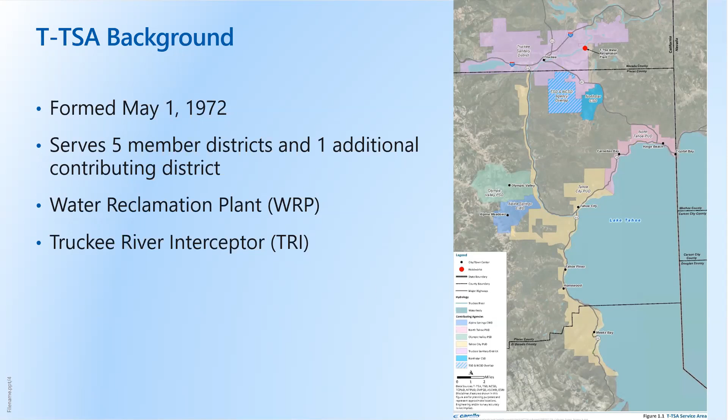So just a little background. TTSA, many of you know this, but for those that don't, was formed in 1972, serving 5 member districts, as well as collection of wastewater from Northstar CSD. You can see the map here on the right that shows the service area that TTSA is responsible for, for collection and treatment of wastewater. And they own and operate the Truckee River Interceptor, which runs from Tahoe City to the treatment plant, as well as the water reclamation plant, which treats the wastewater and discharges it into a soil aquifer basin before it enters into the river.

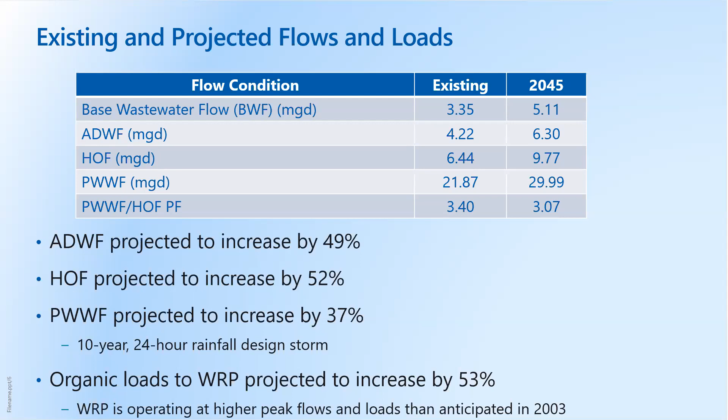So, just to summarize existing and projected, we're looking at average dry weather flow projections to increase about 49% between now and the end of the planning period. High occupancy flow increases about 52%. And peak wet weather flows are expected to increase about 37%. And then specific to the treatment plant, organic loads are projected to increase similarly, around 53%. And it is important to note that currently the WRP is operating at higher peak flows and loads than anticipated in 2003, which was the basis for the last plant expansion. So those are some of the foundational elements of flow that we used.

We did look individually as well at peak wet weather flows coming in from each contributing agency to develop the peak flows that were used for the capacity analysis. And all of this information and the foundations and the justification for these flows are contained in the report.

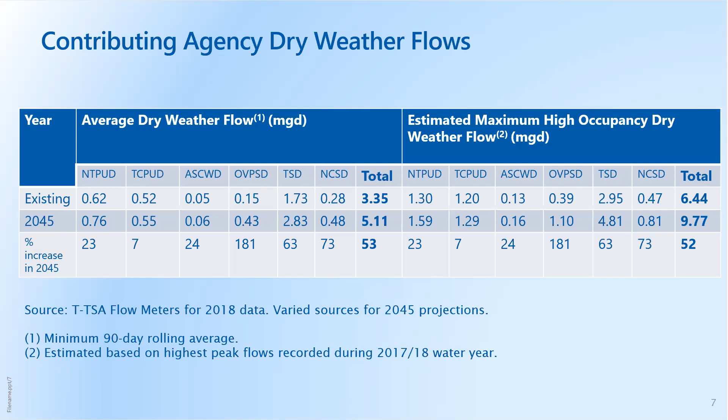So now I'm going to talk about the analysis that we did for the TRI on the capacity side. I'm also going to talk about the analysis we did on the condition assessment. Like I indicated earlier, we developed a SWMM model of the TRI. We calibrated that model to a long history of historical flow events during multiple storm events, as well as high occupancy flow events, in order to ensure the accuracy of that model for the analysis.

And this chart on the right shows the 2045 condition, or the hydrograph coming into the treatment plant that was used for the analysis. And you can see the dash line on the bottom shows the high occupancy flow at 2045, as well as the peak wet weather flow rising up there on the left-hand side of the chart up to 30 MGD. And these were the basis for the capacity analysis of the TRI, and the findings are highlighted here on this slide.

The first one, project C-1, is about 5,000 feet of 24 and 27 inch gravity main that will be upsized to 30 inch. And that's down in the region of the River Road near Bridge 9. The other reach is approximately 1,000 linear feet of 24 inch gravity main that will be upsized to 30 inch, just north of Goose Meadows there.

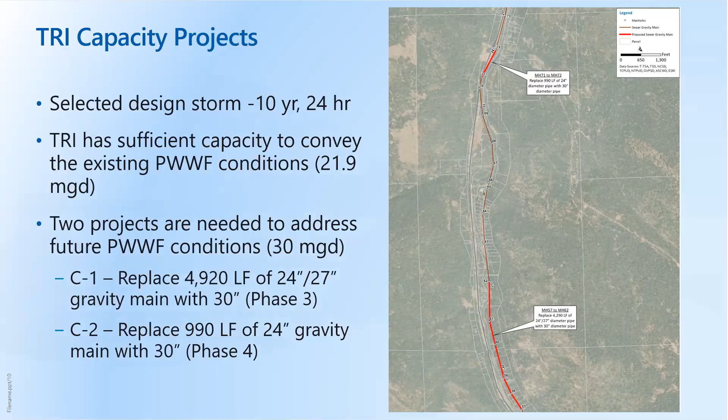And these two are obviously planned to be implemented as growth occurs. And we place them in the CIP in phase 3 and phase 4. So overall, a fairly good news story about the current condition of the TRI, but there are some expected capacity increases as growth occurs in the basin.

So the next element was the condition assessment and rehabilitation recommendations. And this component of work included multiple task elements. The agency has compiled an extensive database of inspection data and CCTV data and condition scoring of the TRI. We took all of that information and data and aggregated it into a single database in order to compare conditions as they've changed over time.

We developed recommendations related to that condition assessment finding and developed anticipated capital projects. We also prioritized those rehabilitation projects and placed them within the 20-year CIP based on risk, and also looked at capital cost expenditures associated with those improvements.

The findings from the TRI were interesting, and they do involve some explanation. So we utilized the NASSCO PACP scoring system, which uses a rating of 1 through 5, 1 being essentially new pipe, all the way to 5, which indicates the need for some near-term improvements.

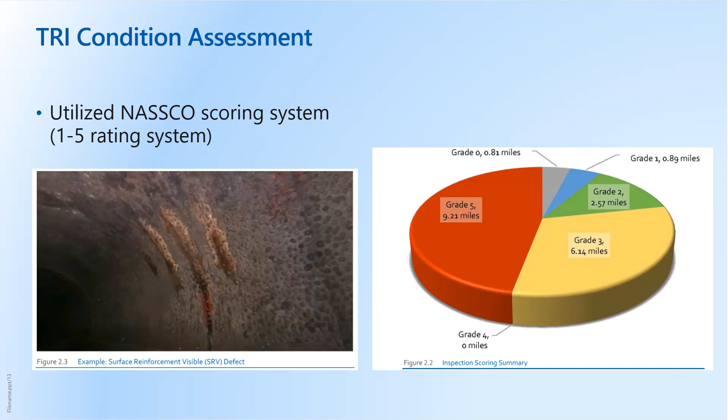So while this graphic shows a significant amount of grade 5 defects, the bulk majority of them are associated with this manufactured defect in the pipeline. And we've developed a plan to implement some further investigations into this surface reinforcement visible to determine the real risks associated with the TRIs and this element of it. Overall, in general, the other reaches of the pipe are in very good condition.

River crossing R1 is about 1,300 feet of 24-inch pipe. That project is set to move forward and to commence in 2022. Estimated cost is about $2.4 million. The other 2 reaches of pipe are significantly shorter, about 220 feet of 30-inch pipe, and those are about $500,000 each. Again, those are scheduled at the latter portions of phase 1 in 2025.

We included 2 other elements of the TRI renewal program. R4 is an allocation of costs over phases 2 through 5 of close to $16 million for annual rehab and rehabilitation projects, as future investigations find them. The agency undergoes an inspection program where they inspect the entire TRI over the course of 3 or 4 years. As new degradation and replacement needs come about, this money will be allocated to provide funding for that in the later phases 2 through 5.

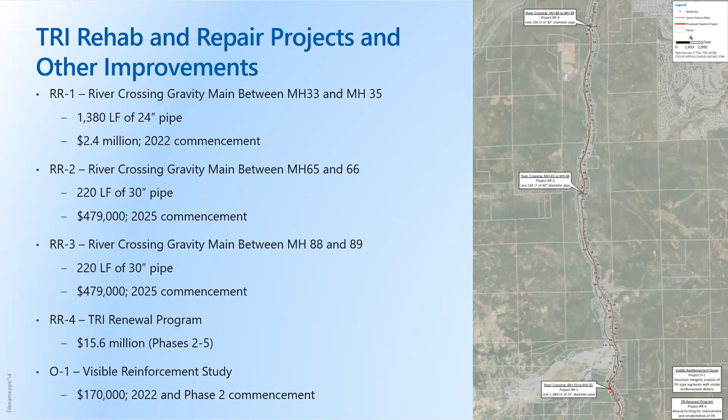The other thing that we included was a visible reinforcement study. We've included some money as a specific project for the agency to go in and do further investigation on the surface reinforcement issues that I discussed in the previous slide. So that's a summary of the capacity and the condition of the TRI. And now Ricky's going to take over talking about the WRP capacity and rehabilitation project summary.

Thanks, Tim. Assume everybody can hear me okay.

So I'm going to review the WRP first, starting with the rehab and rehabilitation project recommendations. Similar to with the TRI, we evaluated the treatment plant both in terms of capacity as well as the condition of the plant, and then also looked at places where we could optimize certain processes in the plant to provide either better performance or cost savings for things such as chemical use.

So moving forward, the plant was constructed in phases. The original construction was in 1975, and the figure on the right is a map of the WRP showing in different colors the years of construction. Yellow is 1975, and what you can see here is that more than 50% of the plant was constructed in that original 1975 construction, and is now approaching about 50 years of service life.

So we'll see as we get into the recommendations for the rehabilitation that a lot of these projects are related to aging equipment and an aging treatment plant, which is not uncommon given that wastewater regulations started in the 1970s with discharge requirements. Major expansions were in 1981. In 1990, phosphorus removal was added, as well as a maintenance facility. 1995 was the chlorine building and headworks building additions. And the last major expansion was in 2003, which expanded the process capacity as well as added the biological nitrogen removal facility.

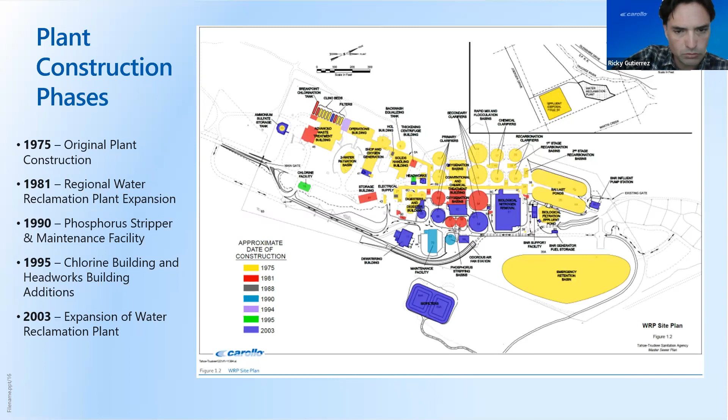So similar to what Tim described for the TRI, we followed a similar condition scoring system for the WRP, with a rating of 1 to 5, 1 being excellent and 5 being very poor. For the excellent condition, these are close to new in terms of the equipment condition. They only require preventative maintenance and have more than 75% of their useful life remaining.

Where we get down to very poor, this gets progressively worse. Very poor is something that has failed or will likely fail imminently, and there might not be parts available to replace those due to the age of the equipment, and so those are obviously things that would need immediate repair and are high on the priority list.

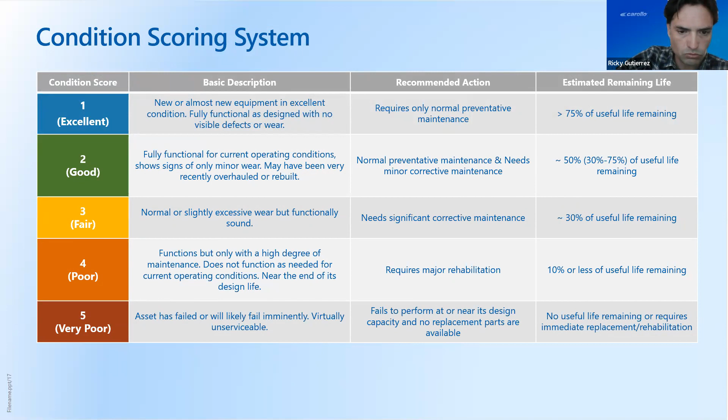So as we went through, we spent several days out at the plant with several engineers of different disciplines. We had structural, electrical, instrumentation, as well as mechanical and process engineers looking at various equipment along with TTSA operations and maintenance staff, and went through and scored the various process components and equipment throughout the plant, as well as looked in detail at the structures themselves.

So we had to make some judgment calls based on when timing of different improvements made sense throughout the plant, and also looked at grouping these into larger projects where they made sense, as that is usually the most efficient way to handle certain things, just due to the way these plants operate. Things have to stay in service and keep flow running through the plant. So you want to aggregate as much as you can to minimize shutdowns and reduce operations and maintenance staff time when dealing with these construction projects.

So when we were looking at when to implement, obviously components that were nearing the end of their expected life or had major issues or were a safety concern were in that near term, 0 to 5 years, phase 1 is what we called it. Projects that were approaching the end of their life but still were functional and had some life left were in phase 2, the 6 to 10. And then other long-term projects needed to address future capacity or preventative measures such as coating and other improvements were in that later phase, 11 to 25 years out.

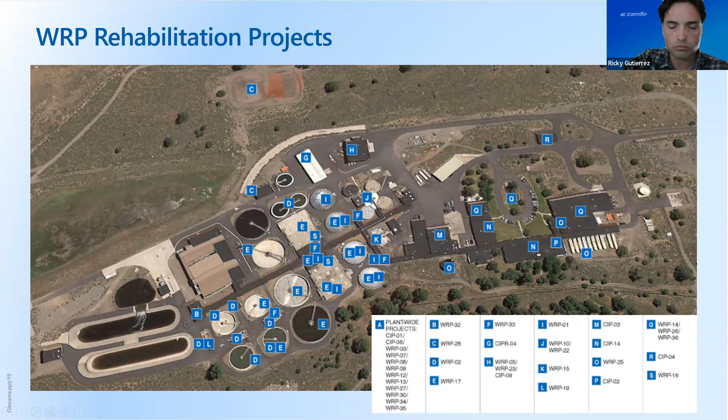So next I'll get into the capacity project recommendations. Starting out, I wanted to give a little synopsis on how we performed the capacity analysis for the WRP. This was a two-part analysis where we had two separate models. One is a hydraulic model using Visual Hydraulics, where we looked at the hydraulic capacity of the plant, how the plant can handle influent flows and hydraulically get those through the plant or to storage if it can't get them through. Additionally, using the BioWin model, we looked at the process capacity analysis, both in terms of the liquid processes as well as the solids handling processes, and the ability of the plant to treat flows and meet the discharge requirements.

So the criteria that was used was, we looked at the peak instantaneous permitted flows of 15.4 MGD. We also looked at the 10-year 24-hour storm event for future conditions in 2045, as well as the future max week high occupancy summer flow conditions, which was 8.13 MGD. And that was important for modeling the process capacity analysis, since that's when you have the highest loads going through the plant in the future.

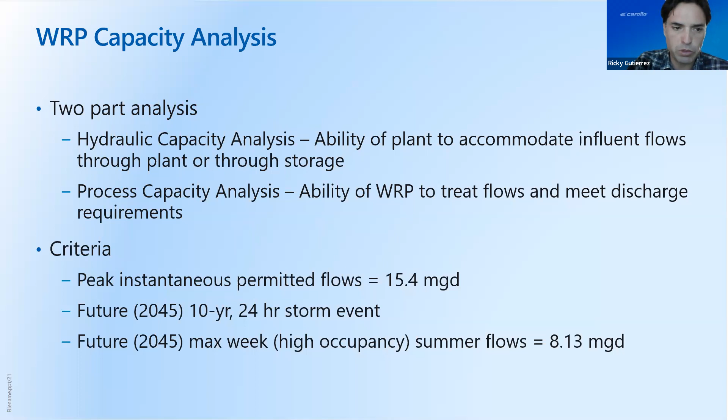So with the hydraulic capacity summary, it's basically a good news story. No hydraulic capacity limitations were identified for meeting those future peak instantaneous flows. The hydrograph on the right, similar to the one that Tim showed earlier, shows that 2045 10-year 24-hour storm event.

The dashed line on the bottom here shows the high occupancy flows. The blue line shows that peak wet weather storm event, which is hitting near 30 MGD. And so if you draw a line across here at 15.4, which is what can be pushed through the plant, you'll see that the shaded area is the volume that can't be passed through the plant and has to go to storage. So we identified that with this design storm event, 13.4 million gallons of flow would need to be diverted to storage. Fortunately, the plant has plenty of storage capacity.

The emergency retention basin at the plant can store up to 15.4 MG. So it can handle that design storm event. For larger storms, there's additional offsite storage ponds that have a capacity of 24 MG. So close to 40 million gallons of storage capacity available to handle large storm events. So no concerns in terms of hydraulic capacity.

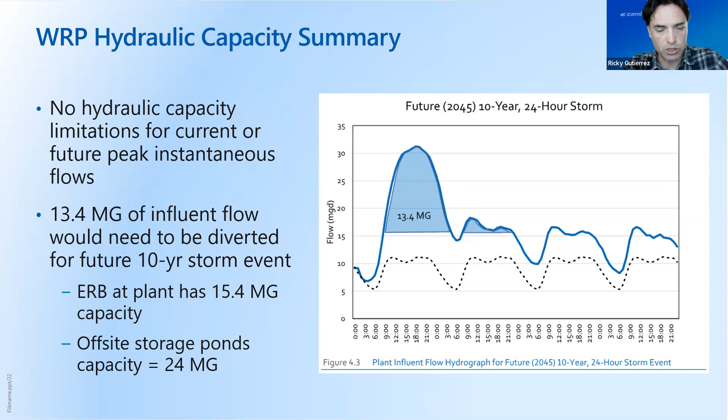The first is the biological nitrogen removal, specifically the denitrification part of that process had some limitations. And so there's a project looking at a nitrified effluent recycle that could help mitigate that. Anaerobic digestion, there was some limitations in terms of volatile solids removal. And so there's some process modifications that were recommended to address that limitation.

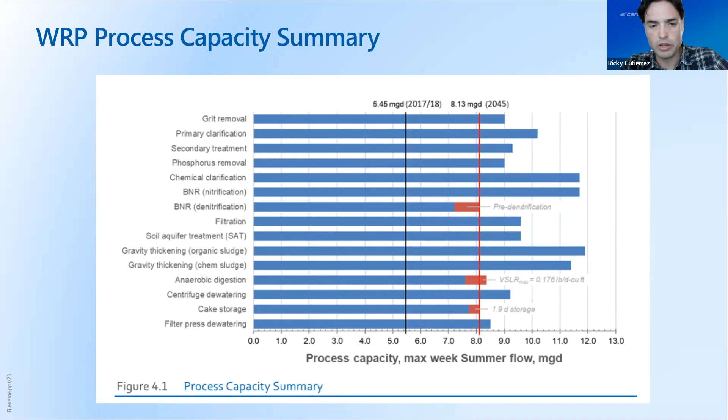And then finally in cake storage, there was identified about a 2-day deficiency in cake storage, meaning that additional hauling would be required or additional cake storage needed. And cake is basically what we call the dewatered solids that come out of the treatment process.

So in terms of capacity projects, 8 capacity related projects were identified throughout the plant. Similar to what I showed before for the rehab projects, the letters here on the aerials show where those projects were identified. And the legend down here relates back to the CIP and the table for what those projects are and the identification of each of those. So far less capacity related projects than rehabilitation related projects, which makes sense given what the findings showed.

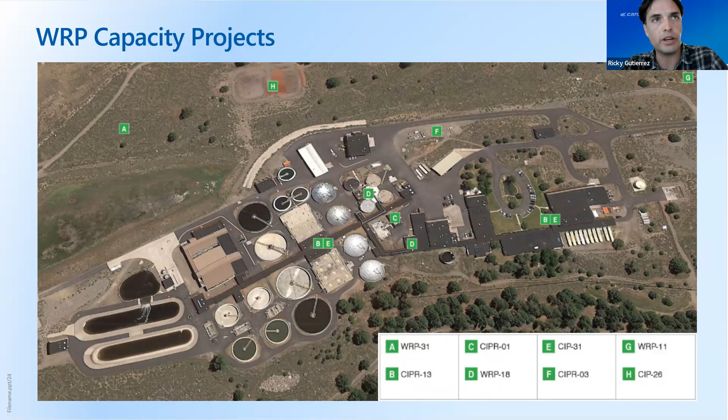And then there was one last category of projects which we termed optimization improvements. And so I'll go through that. And part of what played into this was, as part of the master plan, we did a regulatory analysis looking at future regulatory scenarios at the plant. What could be in store in the future from the regulators in terms of changes to the permit requirements and discharge requirements may come down the road.

So we looked at 4 different scenarios as part of this analysis that we deemed could be possible in the future. One is the waste discharge requirements could remain the same. So no real change there. But even if they do stay the same, there's places where we could look at process optimization. And so that's what we looked at there. There could be more stringent nutrient limits in the future. And so this would require some optimization as well as potentially some process upgrades.

There's a chance that there could be a requirement to go to a National Pollutant Discharge Elimination System permit, an NPDES permit, with additional limits that could be in terms of disinfection byproducts or DBPs, organics, toxicity, metals. A lot of those things could be rolled into an NPDES that would require additional process modifications and additions to the plant.

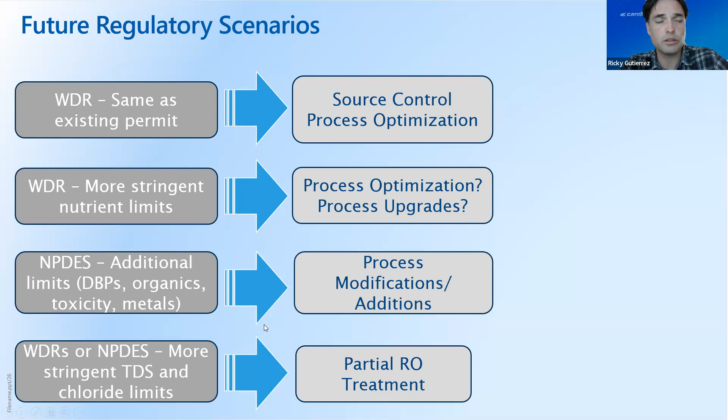And finally, there could be more stringent total dissolved solids limitations or chloride limitations. And this scenario, although unlikely, would have significant ramifications for the plant, would require going to a partial reverse osmosis treatment to remove those dissolved solids. And so obviously much more impactful in terms of costs.

So when we decided what we plan for, what is the likelihood of each of these scenarios happening, we decided to plan for the first 3 scenarios as they had the highest likelihood of occurring. So we have projects that are identified to address all the first 3 scenarios if they were to occur. For the 4th scenario with the partial RO treatment, we have a memo in the master plan that you'll see that looked at space planning for these facilities, but we haven't incorporated the costs into the CIP for this, since at this point it's unlikely that the plant would need to go there.

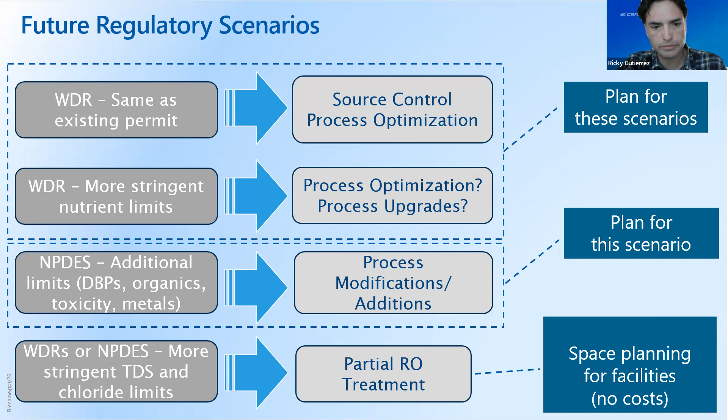So for optimization projects, there were 6 projects that were identified for process optimization throughout the plant. And those are listed here. The first is called a WASSTRIP implementation. The goal of this project would be to reduce lime usage and create a marketable phosphorus product. So there could be some significant cost savings for TTSA if this project's implemented. So it seemed to be worthwhile to look at.

The next projects here are for nitrified effluent recycle, and this is to address the denitrification process limitations. Also, the goal would reduce methanol consumption and could also reduce odors by recycling nitrified effluent to the head of the plant. It also includes some washdown equipment for the BFE pond. The next one here is flow equalization improvements. This would add some additional cleaning abilities to the ballast ponds, which are currently very operator intensive to clean out. So that would facilitate that.

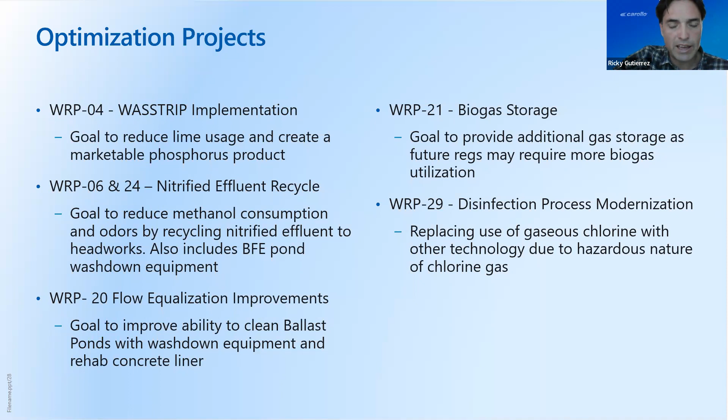Project 21 is a biogas storage project. That goal is to provide additional gas storage as future regulations may require more biogas utilization and less use of the flare. And then finally, the project 29 disinfection process modernization looks at replacing the gaseous chlorine with some other technology due to the hazardous nature of chlorine gas, and TTSA would like to move away from that. So that is also included in the CIP.

So finally, we'll get into the numbers, the costs for the master plan. So the 25-year CIP, as I mentioned before, is grouped by project type: rehab repair projects, capacity improvements, optimization improvements, and other category. It addresses aging infrastructure, reduces risks of overflows in the TRI, addresses future capacity limitations in the WRP, optimizes the treatment processes at the WRP, and there were some project implementation considerations as well in terms of, as I mentioned, looking at timing of new regulations, bundling projects into larger CIPs to reduce administration efforts as they made sense.

And then prioritizing asset replacement needs. You know, there's a lot of old infrastructure out there that needs to be replaced. And so making sure that we prioritize what needs to come first so that the plant can continue to meet its discharge requirements was particularly important. So the total cost of the 25-year plan is $144.6 million. Out of that, a majority of that is for the treatment plant. 115.7 million was for the WRP versus 28.9 million for the TRI improvement that Tim discussed earlier.

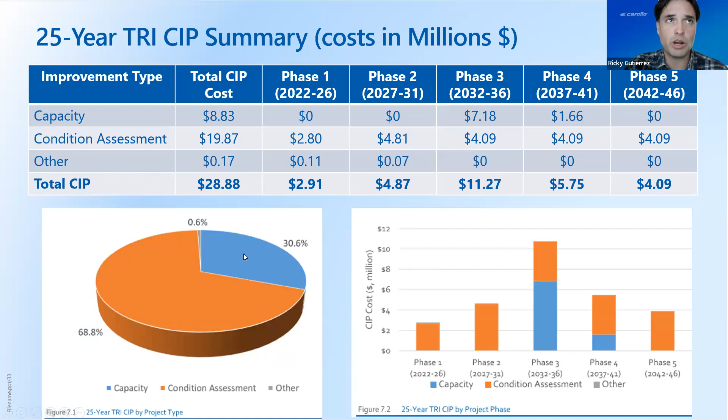And that's when I talked about prioritizing, we're trying to spread out costs through the 25-year period so that ratepayers aren't saddled with a huge amount of costs right off the bat, but addressing the rehab requirements that are needed at the plant to keep the plant operational. And with that, I'll hand it back over to Tim.

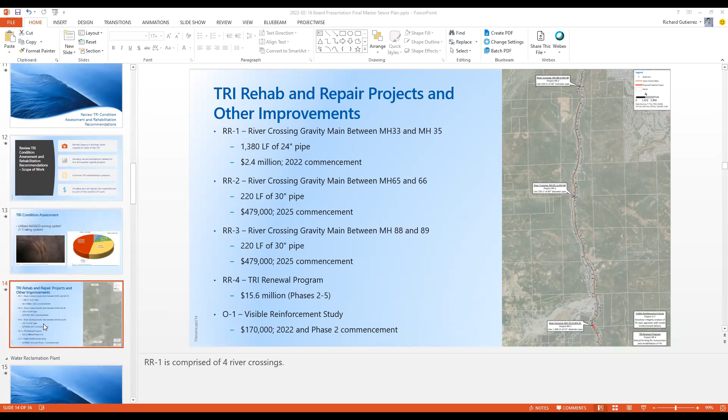Yeah, Dale, there's two categories of improvement projects. The rehab projects that cross underneath the river, there's 3 of them. 1,380 you can see is RR1, and then 2 other additional river crossings are about 220 feet. The 5,000 foot project that you're mentioning as a capacity upgrade is in another reach. It's not a river crossing. It's a piece of pipe that runs along the river. That's what I was thinking. Thank you.

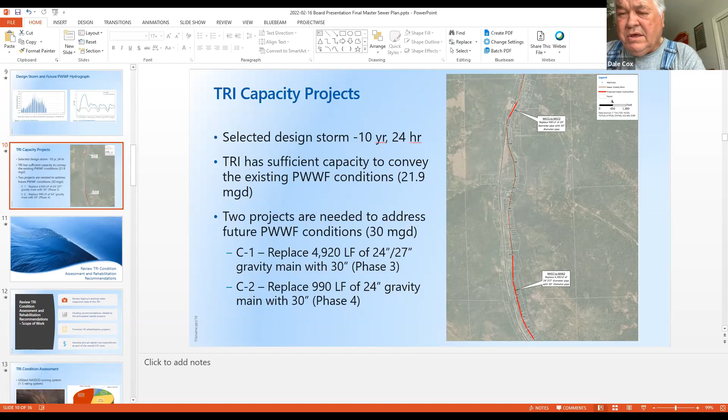Jay, did you want to add any additional information on the quantity of crossings with the first project, because it's such a larger length? Yeah, the first project is 4 river crossings all in one stretch, and there's only 3 manholes there: the beginning manhole before the first river crossing, the end manhole after the last river crossing, and 1 intermediate manhole. And I believe the total length there, Tim, is in the order of 1,200 to 1,400. Like 1,300 feet, yeah. 1,300 feet, and I believe one section was 800 feet long and one was 500 feet long. That's in stark contrast to the other job in which we had only perhaps 100, 150 feet between each manhole. So it's a challenging site.

And just to clarify, the other 2 are just single crossings, correct, Jay? The other 2 are single crossings, correct. And the single crossings sometimes can be more complicated due to the bypass piping. You end up on the other side of the river. This first project, you end up on the same side of the river that you started on, which simplifies things from one perspective, but when you look at the real estate, it's challenging from another perspective.

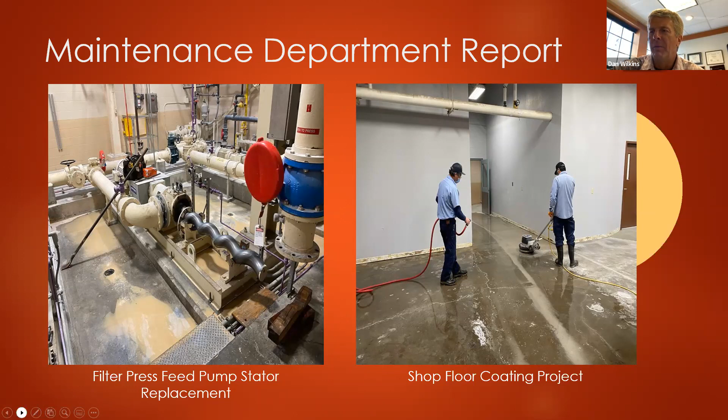Does Ryan have a lot of scheduled electrical? It seems like we got a lot of electrical to take a look at walking through the plant that hasn't been the regular maintenance items. So he must have a pretty good list of things to get done. He does. We're able to allocate a good amount of his time right now, especially during the winter months when outdoor work can be limited at times. So we're able to get a lot of this work done now during these months.

As we move into the spring and summer months, we'll probably dedicate more of our time to the outdoor repairs and just upkeep of the plant. Okay. Well, I'm glad to see it's done in-house. That's great. Thank you. Appreciate it.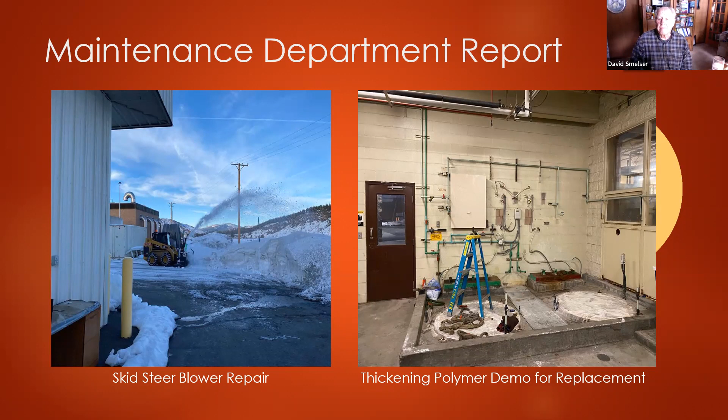Actually, it's the extra usage from the LED lights. No, I'm joking. We noticed that too, looked back, and it was a 20% increase in electrical costs. We went from about 10 cents a kilowatt hour to a little over 12.5 cents per kilowatt hour. So it's a change in the rates from PUD. Yes. Electricity usage was relatively flat, but the rates have gone up. Yes. Wow. Okay. So we'll probably see that continue across the board. So even better incentive to look for efficiency projects. Yes. Thank you.

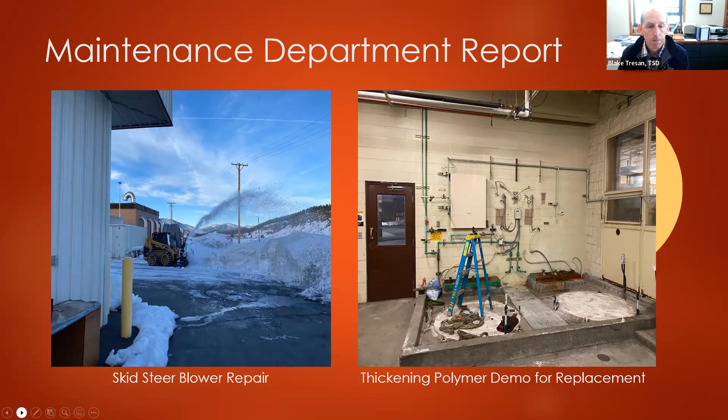Any other questions from board members? Seeing none, who would like to go next on department reports? This is Jay, I will. So for the engineering report for the month, projects completed: master sewer plan, we just saw a presentation on that. 2021 digital scanning of sewer lines project, we're paying out retention there, so that one's complete. Projects under construction: the headworks improvements project, we have a punch list. There's still a number of items the contractor needs to complete in order for us to declare that one fully complete.

Scrubber improvements project, we are in the middle phase. Projects in bid phase, we talked about roof repair today. We also talked about control room upgrades, and the plant coating project is bidding next week. Next slide, please. Projects in development: digester improvement study is ongoing in the study phase, and 3 projects in final design, which would be the 2022 digital scanning, the 2022 filter influent condition project, and the plant improvements project, which comprises the plant final effluent flow meter and some new valves in the yard. And then the 2022 sewer manhole adjustment project preliminary design, and that's adjusting some of the grade rings on the TRI at a number of manholes out in the field.

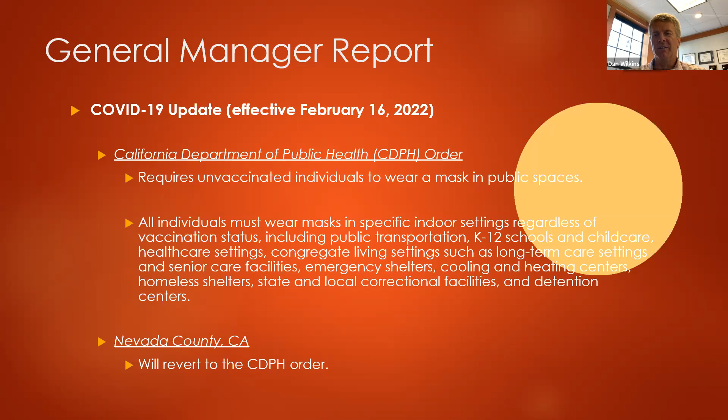Blake? Two items. One is just a follow up on our acceptance of that master plan and my desire to see us get on an agenda going forward, putting out an RFP for a consultant to come in and do a rate, connection fee and service charge analysis, adequacy study with recommendations. I'm not necessarily saying it needs to be March, but we've got $140 million. We better take a look at what our rates are, and the sooner we move forward with that, the better. So that's one item I'd like to see come back to the board.

And the second one is related to some stuff we've done here at TSD that's of value to TTSA and all the member agencies. You saw how that peak wet weather flow spike drives a lot of capacity related costs. TSD over the last couple of years came up with a product to reduce I&I and went into a partnership with a manufacturer on its production. It's called the Hercules Shutout, and it just recently has gone live, and I think has the ability not only for our area, but for the sewer industry as a whole, to potentially cut some of that spiking that happens with big rain events.